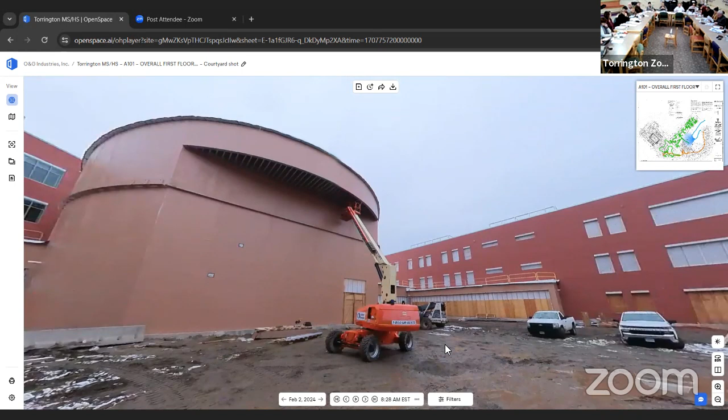So, other noteworthy items in area E and F for middle school. Ongoing work continued with the in-wall rough. The trades have, with the exception of plumbing and a little more hydronic work, all of the in-wall rough complete in areas E and F, which puts us in a great position for when we build out the rest of the space.

We'll be delivering through the academic arts area, the kitchen servery, and the gym for your January occupancy. E1 will also be completed. But the rest of E and F is where we'll be, as contractors, continuing the drywall operations once we get to that point in time. So that's a stop on commentary.

Why don't we let John jump through his presentation, and then I can answer any questions on what work is going on. Just for a quick recap, this is a fun little system we've started using. It's a 3D camera that sticks on my hard hat. I walk around and it pairs me with our drawing, so our model pairs with pictures, and then we can give you real-time pictures and compare them to the past.

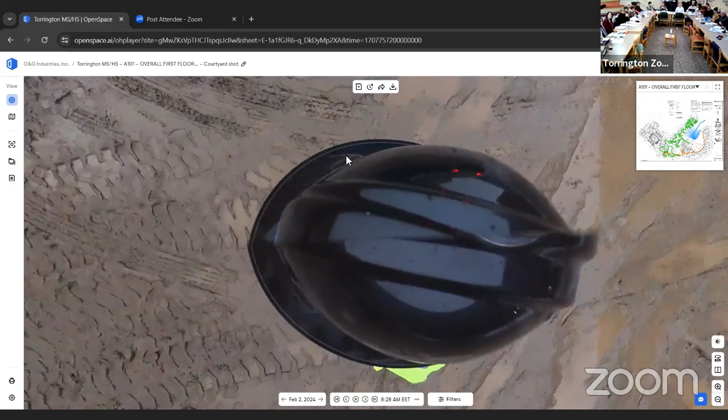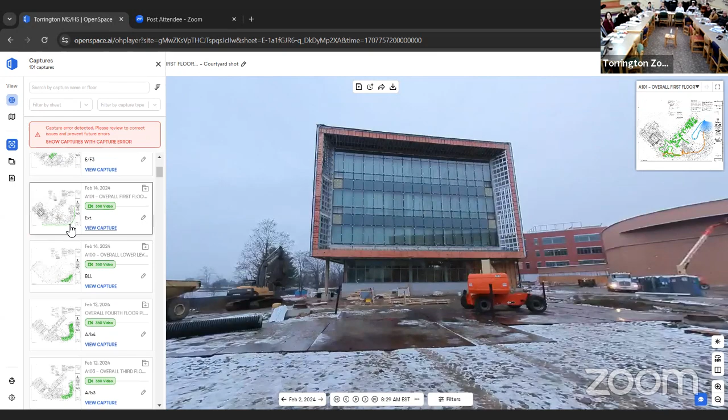Moving around the building, we have our curtain wall framing going up and glazing. These are all relatively recent, within the past week or so. So as we walk down the building, we can see.

The area on your right will be a sidewalk up at elevation, so that you can walk from the parking lot to that first curtain wall, and that's the entrance to the Board of Ed. Where that large yellow piece of equipment is will actually come up to the elevation of the first floor, and people will be walking in that set of doors.

From there, you'll see all the glass that's filled in this one curtain wall.

As we keep moving down, click around - like how you picked a nice sunny day there, John. It's all part of my plan.

You'll see that the majority of our windows again are curtain wall 3, so that is stair 2, and it goes from the lower level all the way up to the 4th floor. From there, we'll keep going around the radius.

Looking to get to the right one - what you'll see now is stair 3. The frames are actually installed. We're starting to put glass in starting today. I believe, Zach, correct me if I'm wrong, Tuesday, Wednesday is when they'll be complete with that.

Oh, I said Friday. Friday. Oh, man. Okay, so one of us lied.

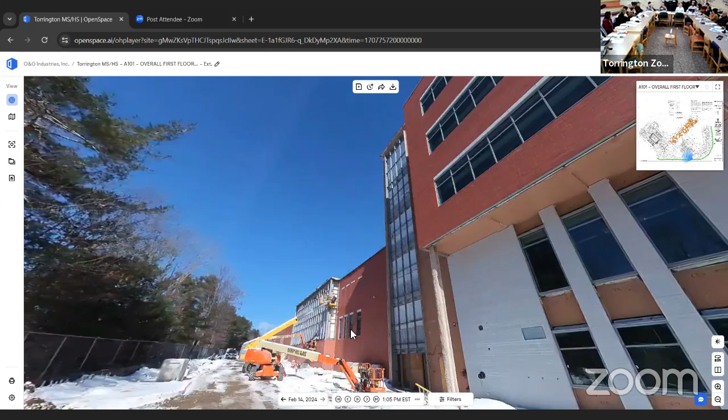Needless to say, they're continuing down the line. Where you see this curtain wall over here, that's your main high school cafeteria. They want to be putting glass in that directly after this. The last big curtain wall facing Route 8 is that curtain wall 7-8, we call that - that is the high school cafeteria.

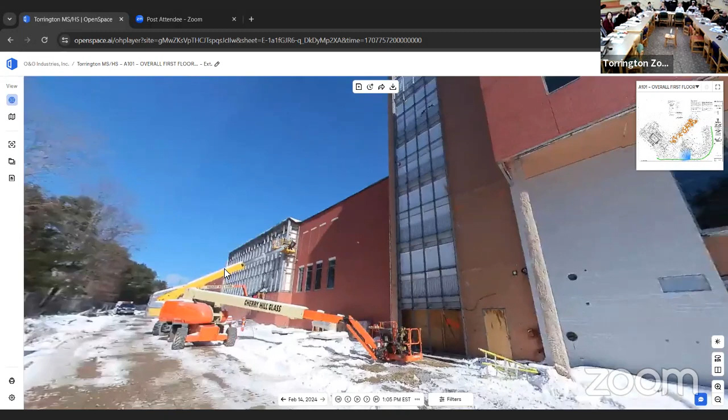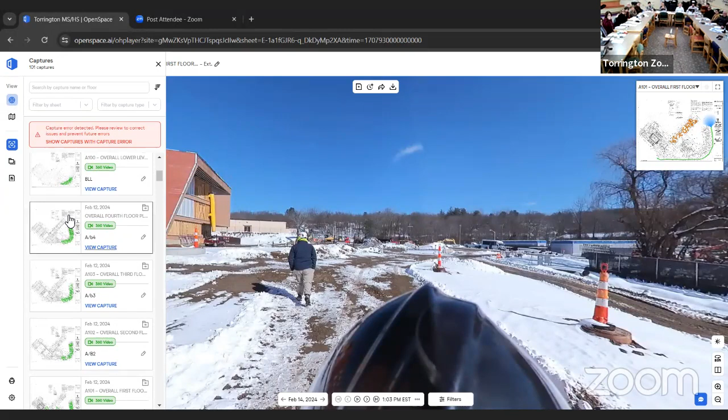Now I can kick over to the interior of the building. We got a little snow. You're looking in the distance there on the left, that's the middle school entrance. Not as large a curtain wall system, but again, a curtain wall system facing towards the parking area.

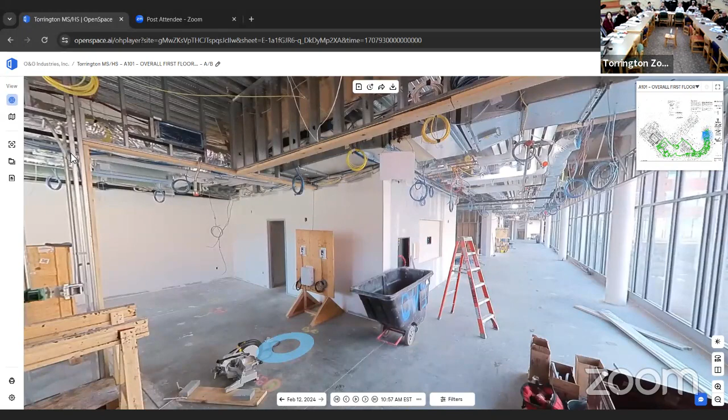So this is actually your view as soon as you walk into the high school, this will be the entrance. What you're seeing, this wood, if you're following my cursor, is actually blocking for our main storefront or your entryway. So you'll walk in, there'll be a transaction window to the administrative side of the office, and as soon as they're buzzed in, any person will have to go into the admin office and then can be released into the school through 2 sets of doors.

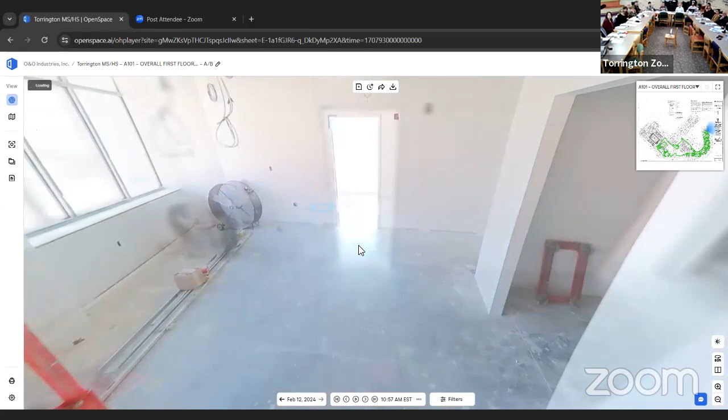They'll walk in and back out. As you can see, we have drywall and our first two coats of paint. Most of these windows are installed, so we're bringing a lot of light into this area, which is definitely nice to see.

Principal's office on the left in the corner office. Going back out the main corridor is the interior view of all that glass, which really allows a lot of light in. This is your primary pedestrian passage when the kids are coming in the main front door - this is the environment they walk through.

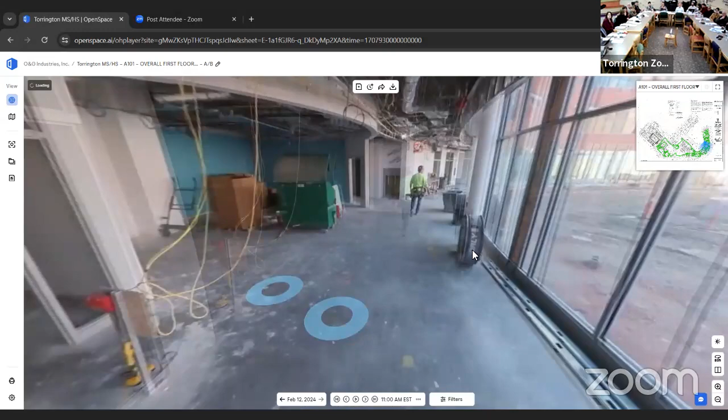Moving forward, you'll see this rounded soffit wall that's actually going to be replaced with another storefront, and that will be your career center. That's a curved section of panels of glazing that isolates that room off the main lobby.

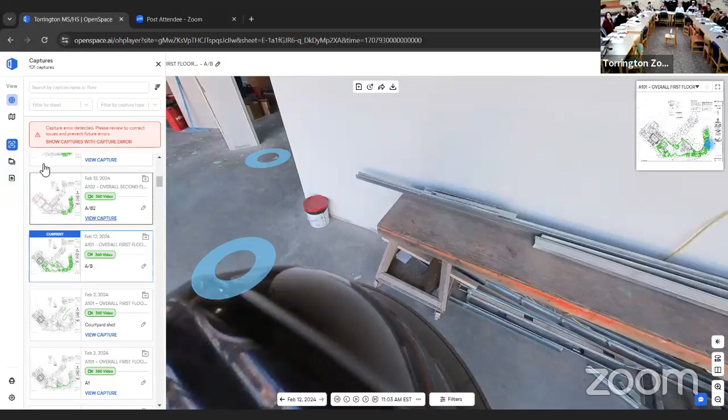Look down, go into other areas just to show off finished areas. We're getting into area B now, so I'm actually going to kick off the floor and continue in A to show you that. As we move up, there's slightly less done because we started the sequence at the top.

You can see all these workers are very happy to see me with a weird camera on my head. It's definitely one of their favorite things.

Once we get into these rooms, this is a typical academic classroom in area A2, second floor of building A. Again with that glazing, what you're seeing here is some of our windowsills - they're starting to block in for those and start to install in some areas. That's just one of our final products, our final finishes coming in.

Casework contractor mobilized the site starting with Corian sills, so we have Corian on all the window sills throughout the building. Next week is a big week for us - they're starting millwork installations. When I mentioned the building envelope, we wanted to ensure it was tight, and the timing of our enclosure has worked perfectly with the scheduled first delivery of casework on Monday.

For those who've been in the building, we're using temporary heat to control the space temperature. We now have a much tighter environment. We can monitor the temperature and humidity control in each of the spaces much better and control it much better as casework moves in.

Continuing on the second floor, what you're looking at is a life skills classroom that actually goes into the suite - a hallway off the main, and I believe there's washer dryers and a stove in this room. Then a few classroom spaces, pretty large spaces, seeing a lot of light. Right on the start of the radius in building A/B, right on the edge.

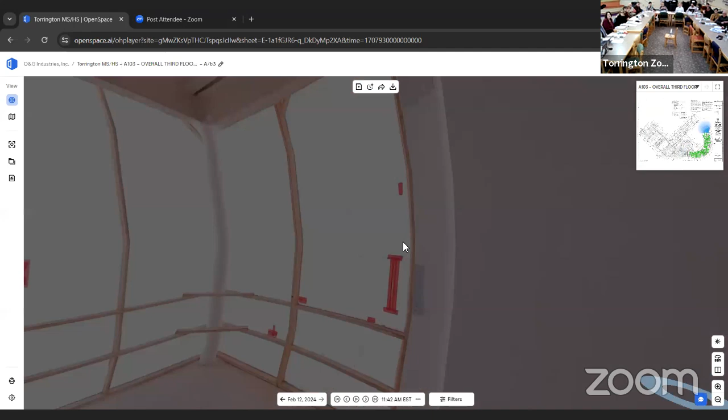Now what we're looking at is actually your media center. This will be your large curtain wall over the entrance of the high school, with a drywall soffit, and then acoustical ceilings all the way around. Where we're physically standing right now are two small breakout areas with different monitors on each hand so that students can use that space to study, gather as a group, whatever they might need.

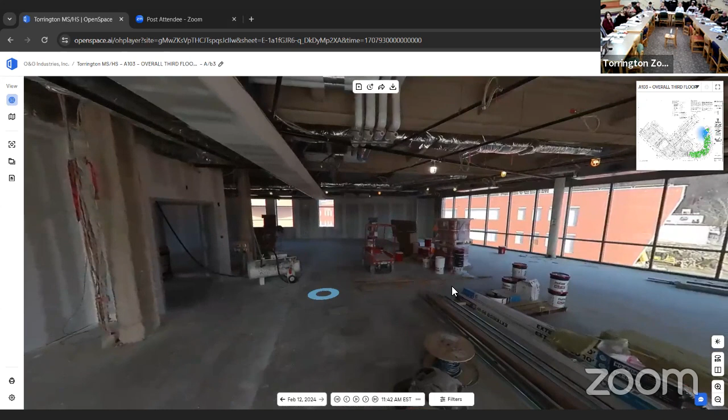You'll see the main area over here is more of a sit-down area, tables for open group work, and what will be your stacks over in the back corner. Here are two offices - I believe one's storage, one's an office. And that is over there, kick over.

It was exciting for us when the curtain wall glazed - curtain wall one, the big one over the main entry. It was pulling down all the temporary plastic protection and letting all that natural light into the space. It gives everybody a much better understanding and feel for what the conditions will be.

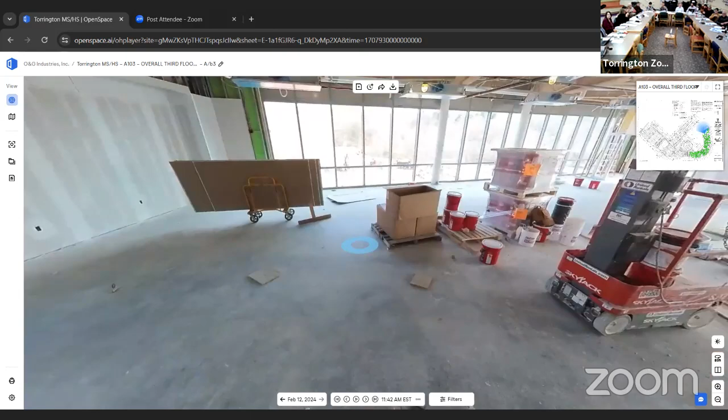So there, we're on A3. Painter's on A3 already, isn't he? Yeah, so this won't show it because they're about two days old, but it's no problem.

Completely sanded, and now our painters started in there. So we keep going up.

We'll go to our favorite office in the whole building, our superintendent's office.

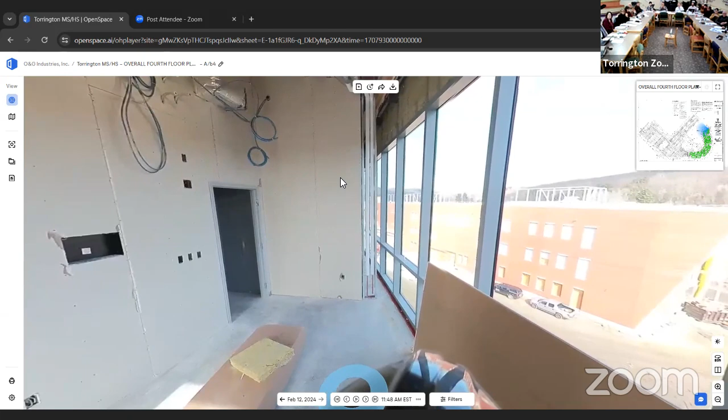What John's describing is the drywall stopped short of the curtain wall at this point, because that temporary protection was there until the curtain wall was installed. So now the drywaller returns to tie that in, and mullion mates the wall system to the backside of the mullion so that people can't poke their head around the wall into your office.

He's gonna miss where he is now. I think he's probably gonna be sad.

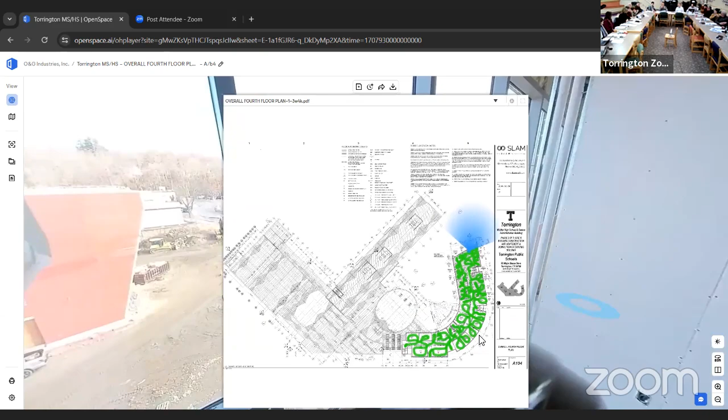So then what we can do is kick over. I'm gonna move into area B. We'll start on the 4th floor and go down, so we'll be getting closer to finishes as we go along.

One of the nice tools I mentioned before is we can show you snapshots in time. If I split screen it here and kick back, this is just a couple of weeks ago - you might not notice much difference since there's been some tie-in. If we go back a little farther, this is about 3 months.

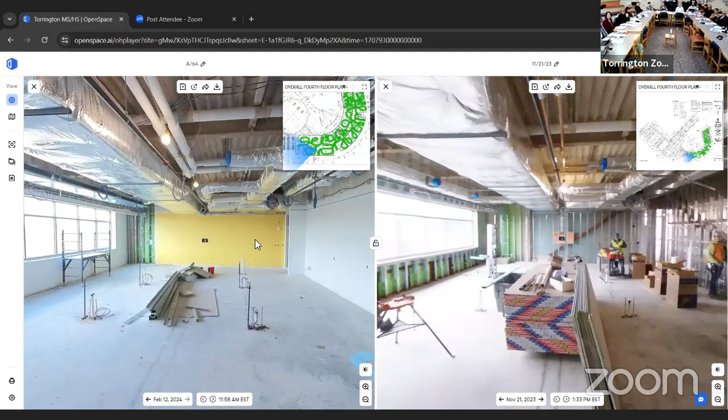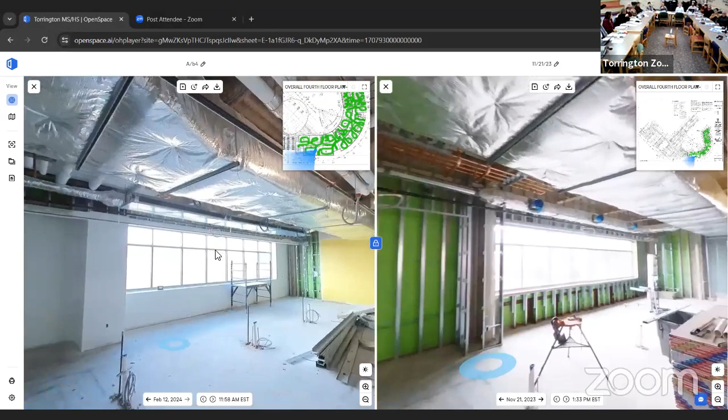As you'll see on the left-hand side, sanded painted drywall. On the right hand, we're opening studs, still installing some plumbing and insulating. So in less than 3 months' time, we went from open cold form metal framing to a pretty closed-in area. And again, this is only halfway through our main building.

So to keep kicking down. Now we're in area B. We just walked down stair 3 to what is the 3rd level. Same thing.

Some of our areas, science classroom on the right. This is actually your physics lab.

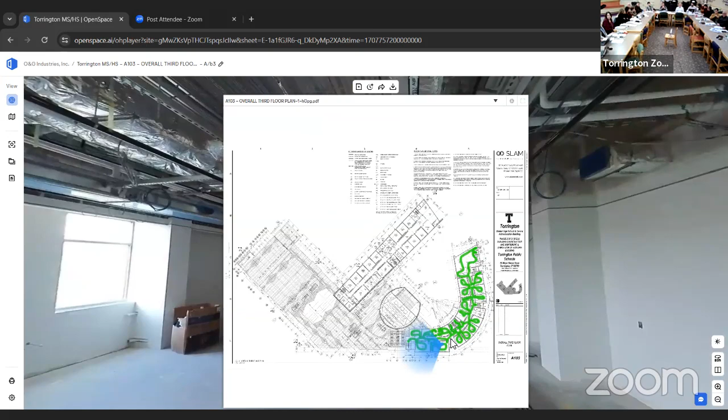What we've had installed is this unistrut going across this metal bracing - a pipe grid in which you could hang weights, any equipment off of, to run physics experiments. That's something that actually got pre-engineered by our general trades and has started to be installed in both the high school and middle school for physics students. The unistrut all lives above the grid, above the ceiling, and then the pipe grid itself is exposed hanging below the ceiling.

In those spaces, we also have cord reels - they can pull down drop power for the kids in the experiments. One more we'll go into. I see grid - that's what makes me excited.

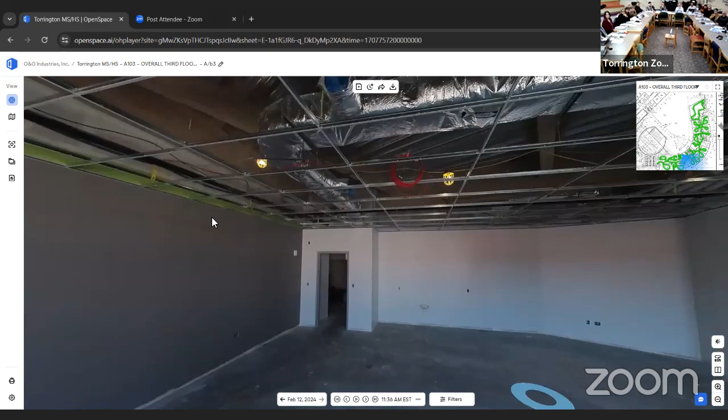So this is one of your main faculty classrooms. Again, you'll see that our grid is in, and we'll start dropping MEP and any above ceiling equipment in there. This is 3rd floor B, so we'll have more finished product as we move down. With that being said, now second floor.

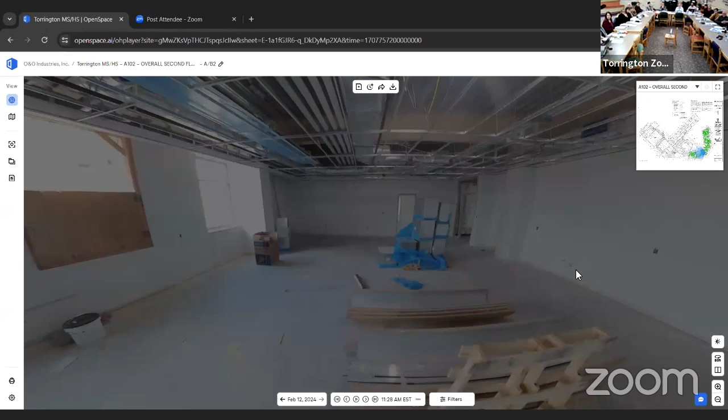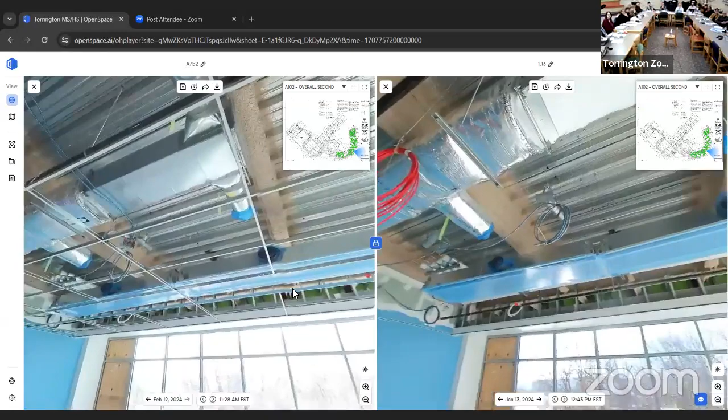There you go, just to give you that split view again, back to the right date - about a month ago. We started to get most of our ceiling grid installed, and I believe even some of our duct work had been labeled, as you'll see. Overhead MEPs continue on.

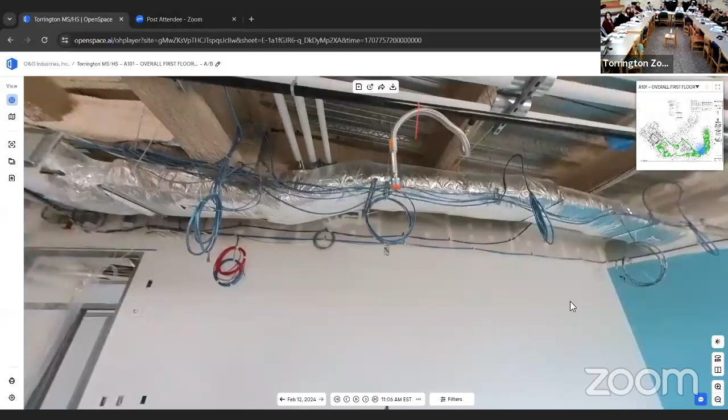Let's go down to the first floor, which will be our farthest along section. One of our favorite rooms, based on the actual design - the foods lab. It just seems to attract attention. The food lab has partitioned short walls so that equipment can back up to table working surfaces. It's just kind of a neat space.

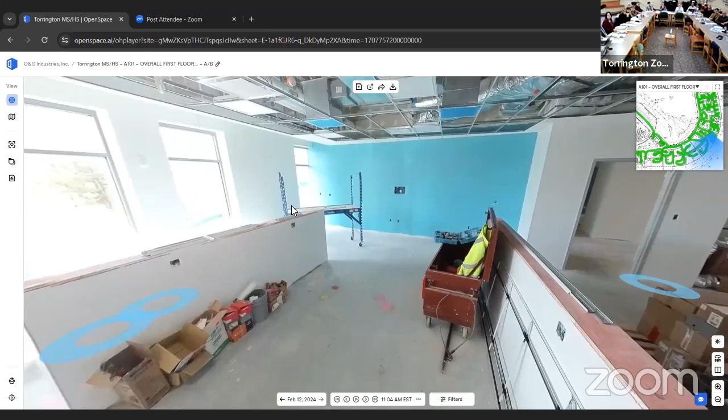I think MEPs have dropped and connected registers there. There's a few lights installed in that ceiling. The discussion with the building official - he's okay with putting in what we call tile cuts. As the acoustical tile contractor moves through these spaces, he likes to get the hard stuff out of the way, which is cutting all the tiles that go against the perimeter walls. So you can see in that picture, the perimeter tile cuts are installed and registers are connected.

A little bit left to do in the ceiling, but the space now generally turns over to casework installation. He's got a 2-week window to put in the casework on the A/B first floor, and then we'll turn that space over to the flooring contractor, so we'll be rolling floors here.

We're going to start with the tile in the bathrooms with the flooring contractor - tile on the walls, and then we'll mobilize the LVT finished floors in the rooms. Just to give you the feel of a slightly different classroom, these are some of the art spaces, art studios. Again, just a quick view.

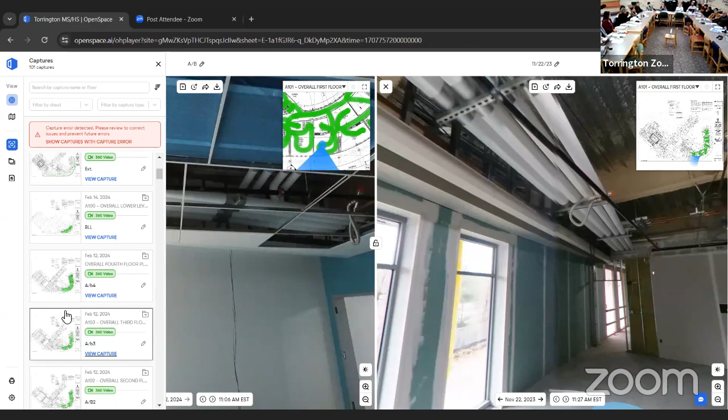So now we're actually in B lower level. Again, we kind of skipped over this area with some of the classroom layouts, but our biggest push right now is the mechanical room and getting all of that equipment set up to the best of our ability. So what you'll see...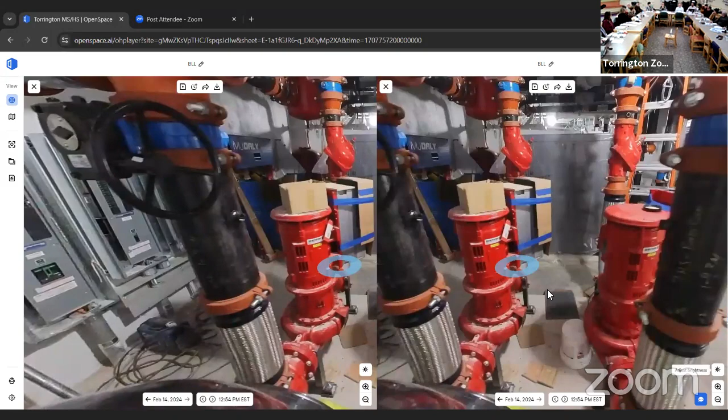Better spot. Today is the 15th, so it marks just about 2 months that the mechanical contractor has dedicated a 2-man crew in the mechanical room itself. He's got all his hydronic piping, his hot water hydronic piping installed. Still have some chilled water piping, pumps are set.

The electrical contractor now is given his first rights. He gets to control the space effective Monday to now power up the pumps, and he's got his panels and his guts installed, but now he's going to conduit over to the actual devices, the motors.

On that equipment, we're marching along quite well to target 4-1, fallback 4-15 for energizing the building and actually starting those pumps.

Big push on the hydronic side, on the mechanical systems of the building, to complete all the piping to the extent of our occupancy. Then there's a process of flushing, chemicals go into the pipe, clean any type of scale or pick up any small amounts of sediment that's in the pipe. And then the pipe gets flushed, gets tested again, for water quality, water cleanliness. Might do that twice, it's not unusual that we have to go through that process twice. And then we'll actually turn pumps on.

So what you're seeing on the screen is about a 2 to 3 month difference in all of the work that's gone on in there. Equipment was moved in, piping down to them. Like Dan said, we released the electricians, like the before and after.

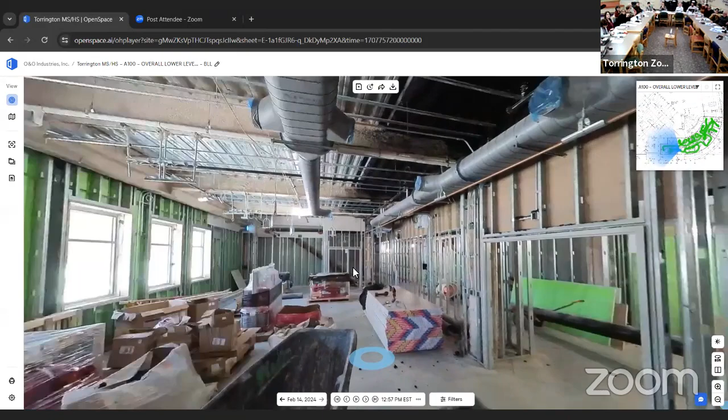Just to give you the quick view, not much else has gone on around here. Really just stopped in this area, other than a few of the panels. I couldn't get into our main electrical room when I was walking just because it was locked up. I didn't bring the keys that time, so that was my fault. I'll definitely get you some updates there, but otherwise, just kind of a stagnant area for the time being.

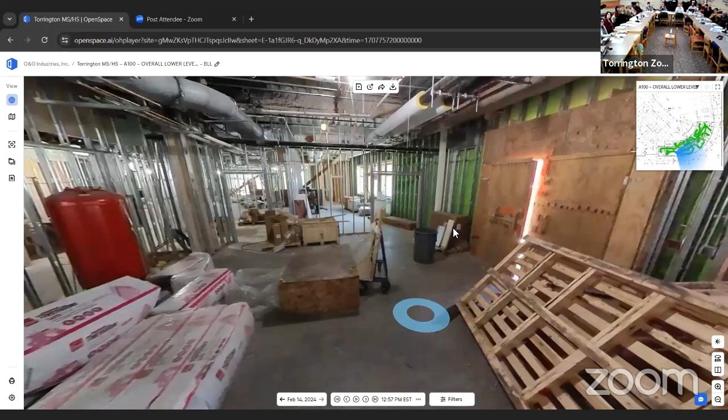The classrooms are stagnant, as John mentioned. So that's the engineering tech space. Beyond is the engineering lab. Again, we suspended work down there, kept the crews moving, kept the crews working. That's the portion of the building that is in current design for how to fit the desired wood shop equipment in that space.

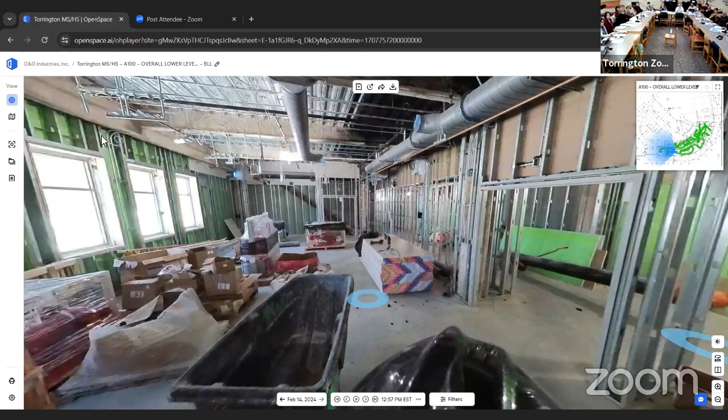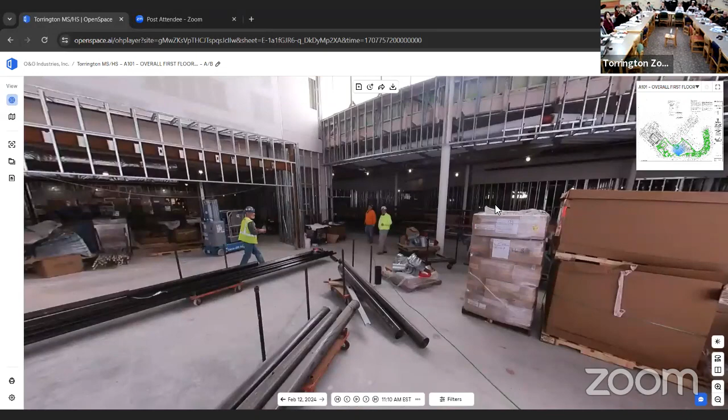Moving back upstairs, drag everyone into the cafeteria space. Yeah, it really changed the feel as we opened up, as we walk now through area A, you walk through area B, and then you enter area C, D. Here you're looking at the high school cafeteria. That's the last curtain wall we were just looking at, 7-8.

That'll be a storefront. No, that's not a storefront, it's an open space that you walk directly into the caf. But the framer's been in there heavy in the last month, got all of his studs up, put up some sheetrock, servery.

So those guys came in, started installing those. They come in as panels, 2 metal panels with some foam in between, and they kind of sandwich together like little erector sets. I'll bump back real quick.

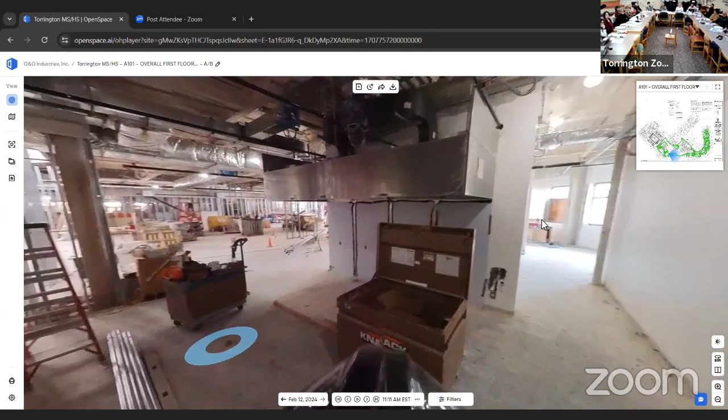As you recall, we put in the hoods, our food service contractor owns the hoods over the cooking lines. Those were completed, now you can see the picture of the stainless hanging. And then about a week later, their team of cooler people, a different subcontractor for them, came out. They set the boxes. They have to run refrigerant, 2 split units, or 2 condenser units on the roof.

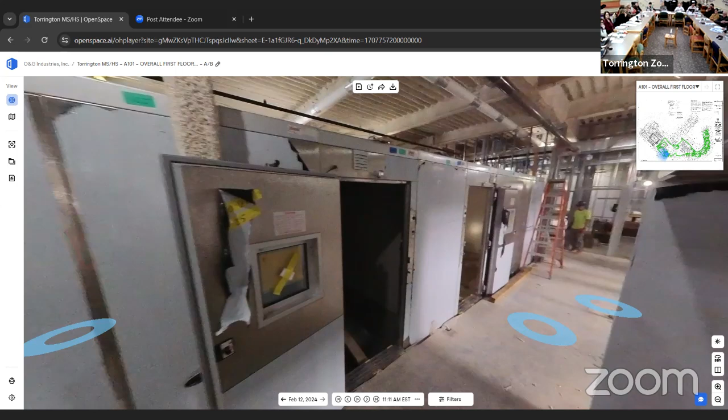As we look at how sequence works, once we're done with the sheetrock, the in-wall and the sheetrock on the academic arts side, we'll flop over to the high school, middle school cafe and kitchen. From there, our next big focus is our middle school gymnasium.

With that being turned over, the masonry or interior CMU was complete. And now our painter is actually completely done with the elevation we're looking at of what is block filler. That's that grayish paint you're looking at. It just kind of fills in some of the porous block and any imperfections, making it a nicer finished product. So we've actually completed the wall on our right, including the face wall here.

So temporary protection in the windows, roofing on the structure. That area is now dry. Roofers actually remobilized to the site to pick up the small roof areas on the perimeter of the gym. That work's ongoing currently.

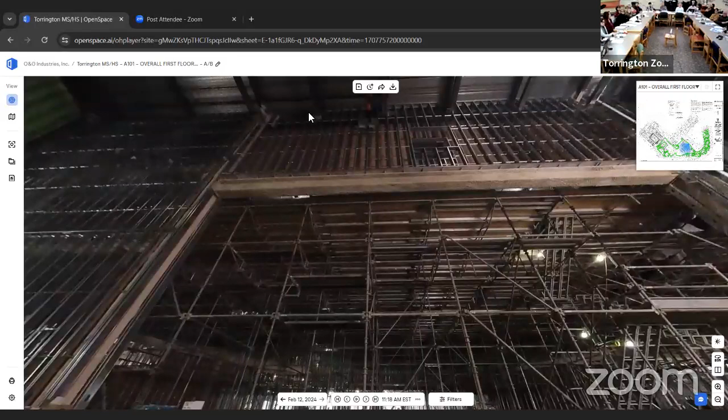Moving just to show you, because we have the auditorium scaffold up, I can't walk in this area. So that's a dance floor that goes all the way up, nice and flat, about 10 feet off of the finished roof elevation. And that allows our guys to get up there and actually work on any MEPs or anything hung from the roof deck.

So for the time being, there's one too many pipes in my way to walk around where the seating actually is. But I will keep walking through what is the actual stage that you're looking at now.

Our drywaller has gotten up there, thrown up his initial board, and I think they've done two layers back there. So they did that just to get it out of the way before everybody else goes in and puts all of their overhead work in there.

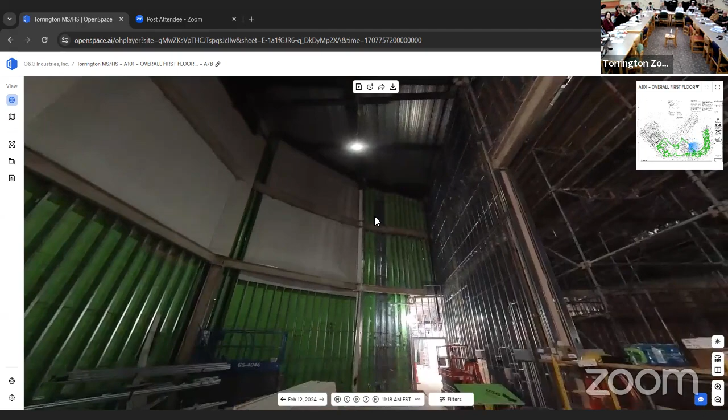But we're starting the process of AV equipment and all of the boxes that need to be installed where they're going.

So I was asked a specific question during the walkthrough that I did Saturday, plus a Saturday ago. The proscenium is 45 feet wide. Casey asked that question. Yep.

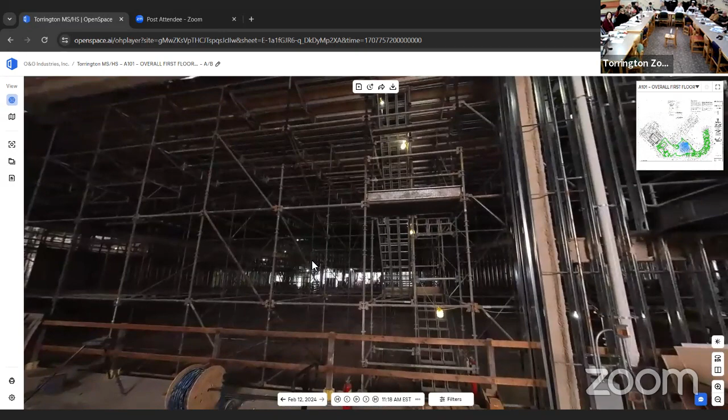So you're looking out towards the auditorium. Yeah, ongoing work in there. Beyond that is the academic arts, that's where sheetrock is ongoing. And then to the right of that is area E now.

Give you that quick look, what Dan was saying, drywall started in these areas. I don't have a great walk in there, but let's see those separate classrooms, which we're calling the academic arts. With that being said, I'll kick into E and F really quick. Again, this is more fallback work in the sense that we have contractors that are in there early.

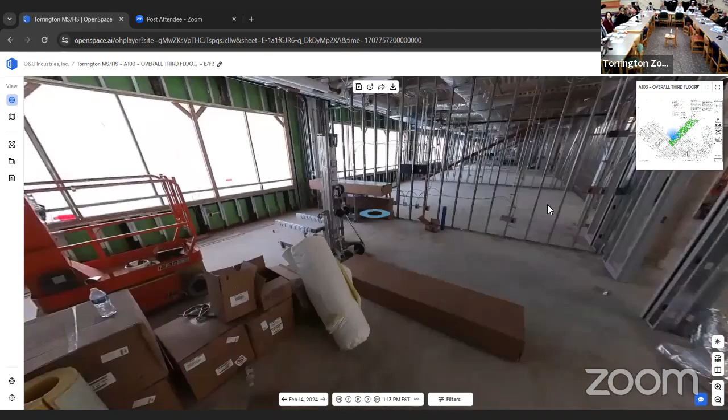Most of our MEP in-wall, so our outlets, power and data, including fire alarm, seem to be installed already. As we walk through, most of our crews have a couple of guys there picking away at some work that wasn't necessarily needed at the moment, but they had the manpower and the equipment, so they started putting that in.

Yeah, the electrician took advantage of an open space and was able to pull crews from another site to run through an in-wall rough. So having all of the in-wall rough complete all the way up through E-F 1, 2, 3 is really beneficial for what is a demand on the electrical contractor.

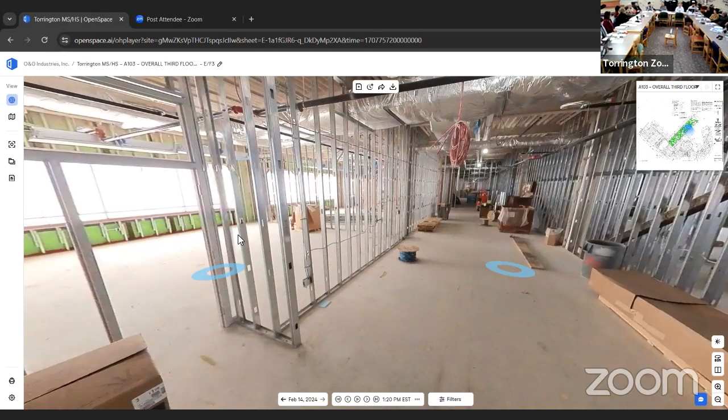At this point now, he's got to be piping to mechanical equipment, he's got to be piping to motors, he's got to be working on interior finishes in the classrooms. Not having him stretched thin elsewhere is a good position to be in.

That being said, we'll keep moving down. Now we're on third floor, E and F. What we're looking at is a loading zone towards the entrance to that building, so towards the face of the F building.

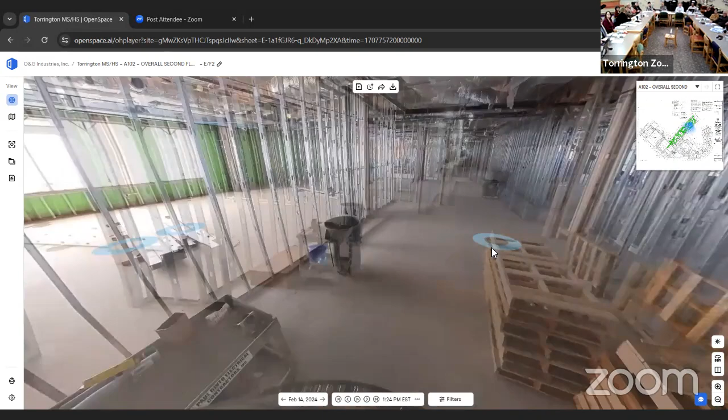And again, same status. Most of our in-wall rough has been installed very far ahead of schedule in this area. The things that we have, that work started early. So not too much to dwell on.

Just to complete it, we'll go first floor of E and F one more time. You'll see your elevator pits are all set, covered with the safety per the manufacturer's request. You can just walk down that line.

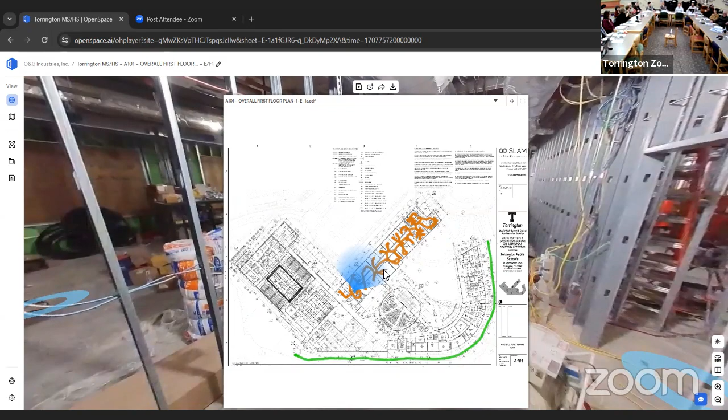We're seeing actually the middle school maker spaces on the left, which I believe we're still doing the temporary locker rooms, changing rooms. There are no lockers in the space, but it is where the kids will change, essentially from January occupancy through the June release of 2025. The two maker space rooms are temporary uses for changing.

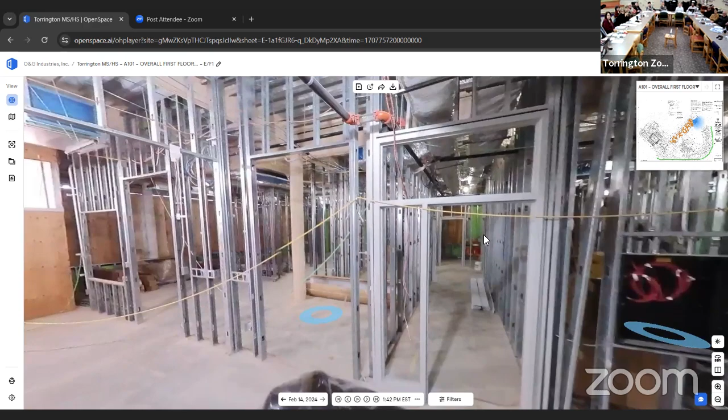That being said, we'll kick over to the middle school entrance, and some of the administrative offices, which are right here on the left when you enter. Again, a lot of in-wall rough-in has been done, nothing too crazy. I believe this is actually one of our Torrington residents walking by, who works for General Trades. I don't know where he snuck around, lost in one of the pictures. That's the main building entrance.

Does anybody have questions, or anywhere they want me to zoom in on real quick?

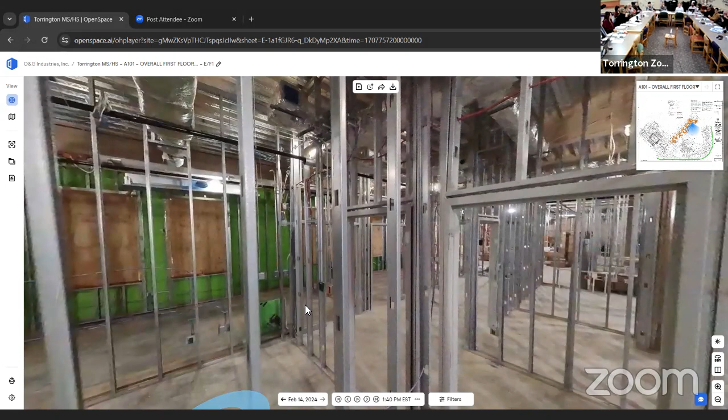Yeah, just one question. Do you notice that the ceiling grids stop short of the window walls in most cases? Is that where the cooled water chilling goes, or is that just because the windows are taller than the ceiling, it would look awkward? It's actually, you're almost right.

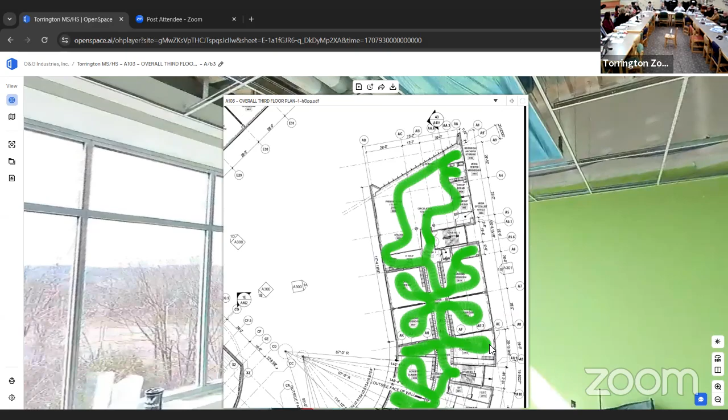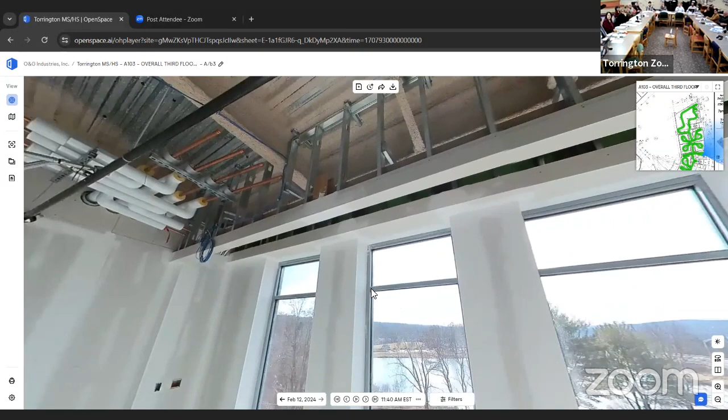It's where the radiant panels are, so it's where your hot water lives. Against the exterior windows, against the exterior wall, there's a cavity that's 24 inches wide. You can see the soffit there in that picture. Between the soffit and where the grid terminates, up about 8 inches, is the head of the window. That's where a 2-foot wide hot water panel just provides radiant heat. There's no forced air in that condition, it just falls, the heat falls - window wash, essentially. The chilled beams are further out into the space and hang in the grid. They're wrapped in blue there.

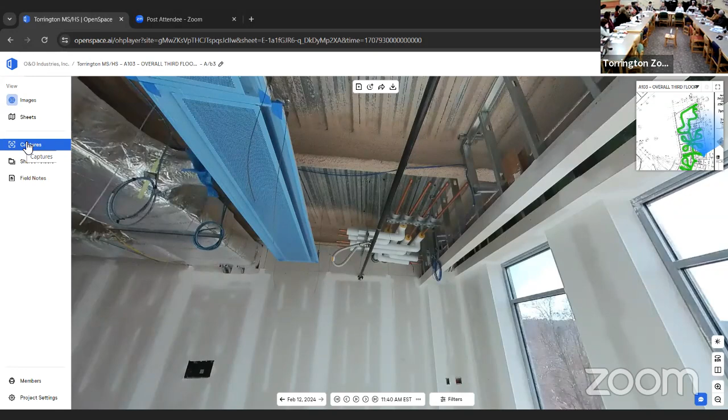Thank you. The coolers are alarmed, they have control panels, they're keeping track of temperature. They do send alarms if the temperature falls out of range. Yeah, yeah, okay, thanks.

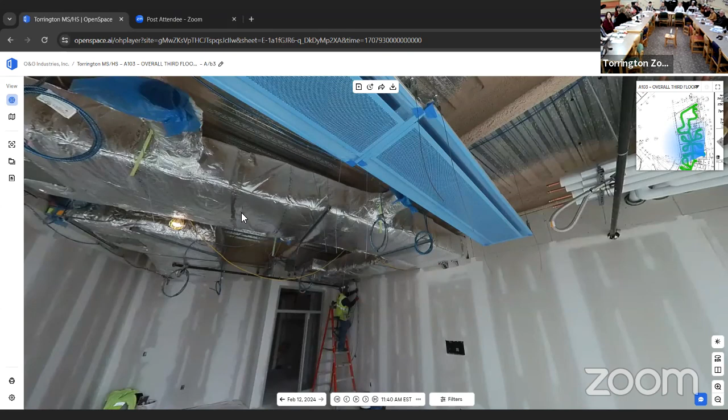Let's see, did we hit on critical items? Did I miss any, Zach, being my guy in the field? Anything we want to touch on, the water on the exterior of the main building is underway. So we're looking at permanent connections to the building being finished on the water side. I'm going to say it's around March 1st.

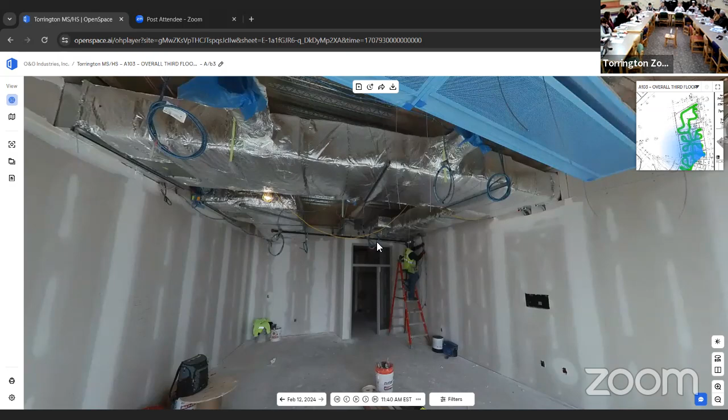And then we have a process where it goes through a pressure test. All new water piping on the exterior of the building gets chlorinated, and then tested that there's nothing bad in the pipe. The water comes back clean, and then we can flush that pipe again into the building and make connections to the building. So the coordination of timing is working well, and we expect water delivery to flush these pumps, or flush the system, around March 15th.

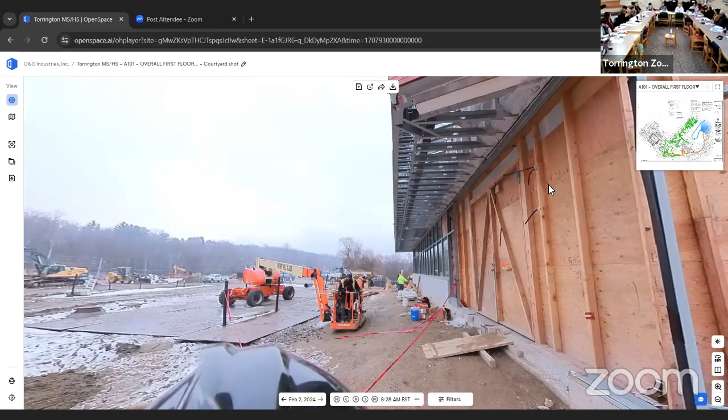But that's triggering on Eversource. I think I've mentioned to a couple of people, we had large concerns over whether Eversource was going to step to the plate, because they hadn't set the poles over the summer that we had hoped they would. But through some assistance and cooperation that we got from Eversource, poles are set. Eversource has been on the property several times now, and they're returning again next week.

Yep, and there's a primary pole, so they have new conductors that they're bringing onto the property to put on the new poles. Then it's a matter of pulling power to the backside of our building into the switches and the transformers. Getting good news, exceptional news from Eversource today - I'll let you deliver that news. They don't foresee the transformers being an issue, it's pretty much work out a date with them and they'll be there.

There was a shot over the bow from Eversource that they had a concern over transformers not being stocked in their yards, and when you don't have one and they need one, they're having supply chain problems. But we've been talking about transformers, and getting transformers set and set aside for our project for almost a year now. Through some conversation, we have really strong confidence that we will get the transformers earmarked for this project, and we will get them by March 15th. So that is a large weight off my mind, because you can't control that particular entity - it's much harder to control.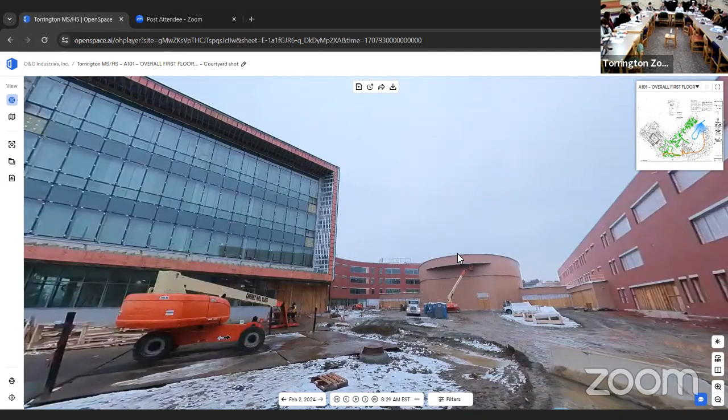Exterior wise on the building, a lot more framing is going up. You can see the picture frame around curtain wall 1. There's a lot more framing and studs installed for the rain screen system. Panel contractors have been on site for a couple of weeks putting in that back system, the framing system, and insulation. They're almost ready to start hanging the panels on the structure.

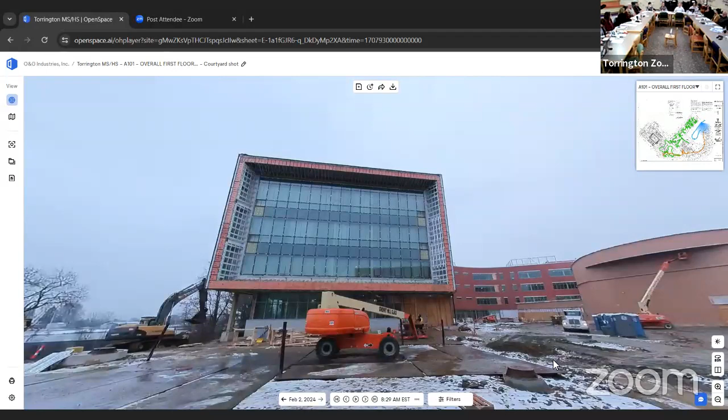There's the veneer on the auditorium itself. Not in that photo, but yes, we looked ahead at whether it would benefit the project to spend a little extra on temporary heat and start the mason now rather than March 15th to complete the veneer on the exterior. So not in that photo, but existing in real life right now, masonry is going up on the sides of the egg, headed towards the roof.

It just benefits the job to see him off the job, and to get that veneer off. For those that, I love the guy, but he makes a mess.

So those that love the terracotta look, that's been kind of the look for a long time. Take a look at it now because it won't be there much longer. That's right, so that white, ground face CMU block that exists on the outside of the radius is the product that goes on the face of that auditorium, and is in progress.

When I say small cost, we're haggling over $8,000 per heat, maybe $9,000 per heat, depending how quick it is.

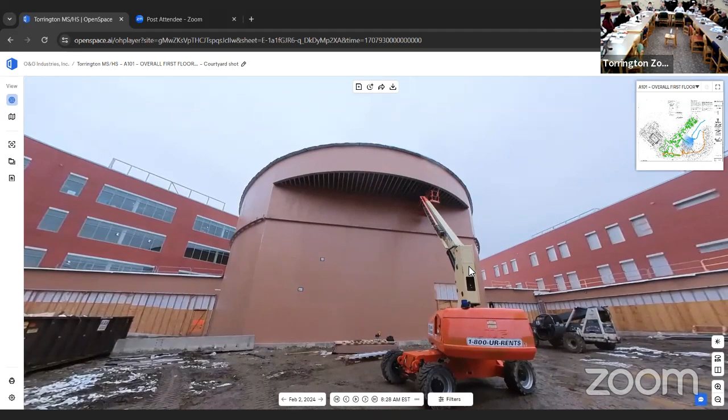Again, overall, the schedule has not changed. We have not had any impact to delivery date. The two areas of concern on schedule remain the design of the lower level, and the designs on what was the E1 SRO change, as well as the temporary classroom we're going to create in what was the instrument storage room for middle school equipment, which is now going to become a health classroom. We've got the documents, I'm pulling pricing from the trade contractors, and expect that we'll pull that information in before we're about 5 weeks away from being at a point to sheetrock that area of the building.

So that is what we've been doing, and that's what it looks like. I'll jump from commentary to what I should mention on a couple of cost and schedule items. These are in your packet, but also individually handed out.

I'm at a point where I'm close to the mason buying in. Again, I'm trying to get down to a solid and total number. He has a small labor associated cost with doing the work in the spring as opposed to last fall as originally contemplated, but we're not far apart now. I'm going to beat my estimated cost there.

I mentioned the program changes that I just spoke to in the lower level. For your record, at one point the cost had ballooned up from estimates on what that whole change related to the lower level, as well as moving the faculty dining, creating some offices out of spaces that weren't offices, had ballooned up to about 250. We've already spent 24, I have another 50 in, and then 145 for the remaining. So slightly less than the balloon up to the 250 number.